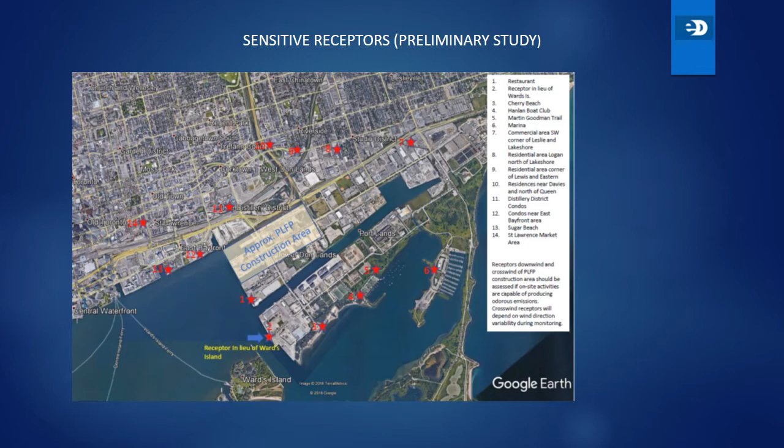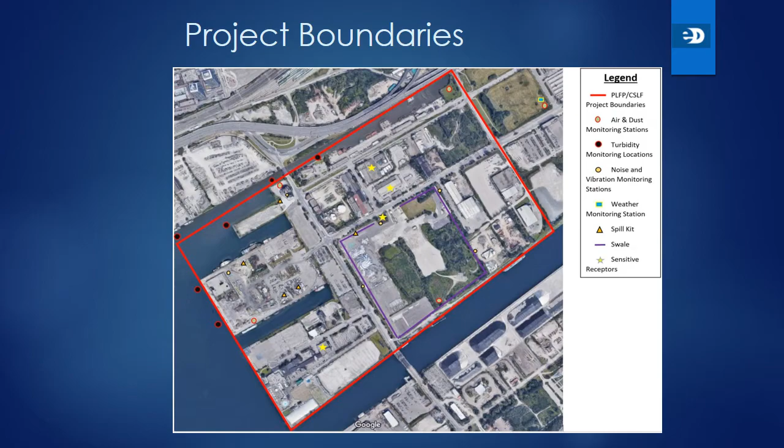Team and subcontractor responsibilities. We as a team must enforce the environmental plans, just as it is everyone's responsibility to ensure the safety of workers. It is everybody's responsibility to ensure the safety of the environment as well. At the end of the day, we want to make sure that we are managing the impacts of our work zone within the guidance of our environmental plans.

So in the event of a complaint or ministry visit, we can justify our actions. In terms of monitoring, inspections, or reporting, we rely on our subcontractors to inspect their site and report on any deficiencies that may arise, so they can be addressed proactively rather than reactively through a client or public complaint.

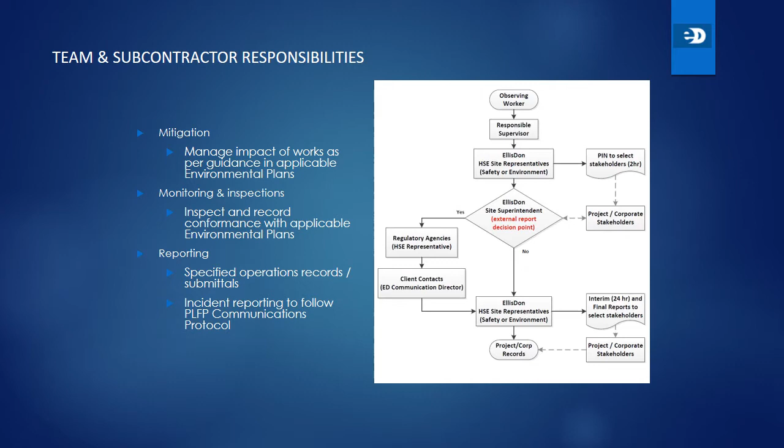Air quality and dust controls. The material that is being excavated on the Port Lands site is heavily contaminated. Because of the baseline studies completed prior to the project, it was determined that EllisDon would have to ensure adequate air quality monitoring. Volatile organic compounds, also known as VOCs, have been found inside the soils and are known to be harmful to workers' health and safety, as well as the public health and safety.

What EllisDon has done is set our exposure limits to the most stringent levels, set out by the Ontario government's occupational exposure limits. Benzene has the lowest exposure limit for VOCs, and also has the highest level of concern. All subcontractors completing excavation work on the Port Lands job are required to do VOC monitoring.

The 8-hour time weighted average is 0.5 ppm. If surpassed, a half-face respirator must be worn to continue work. If the short-term exposure limit, also known as STEL, is exceeded to 2.5 parts per million over a 15-minute period, a half-face respirator is required. If 5 ppm is exceeded, a full-face respirator must be worn.

If a full-face respirator cannot be worn, the area must be evacuated until proper controls or PPE can be put into place. If the full-face respirator is donned, this level of PPE will cover the worker until 25 ppm, at which point the area must be evacuated and no worker shall enter the work zone.

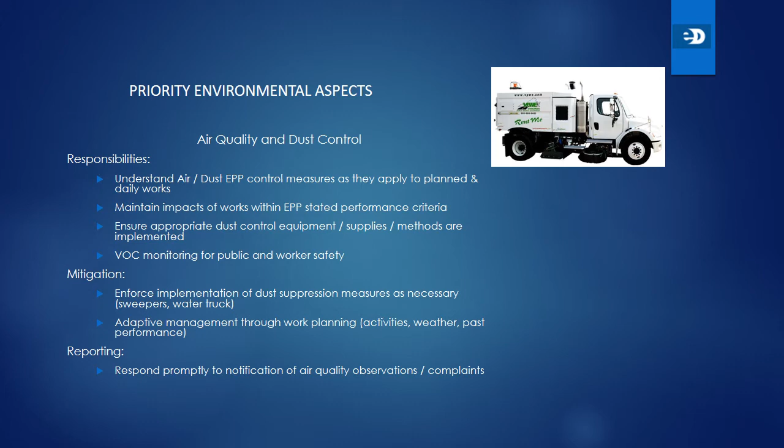Dust management. There are 5 air monitoring stations around the job site, which give us real-time updates on how we are impacting the areas around us, and how we are managing the site when it comes to dust and air quality. If there are any concerns regarding air quality or dust management, please reach out to your supervisor, EllisDon Health and Safety, or EllisDon's environmental team.

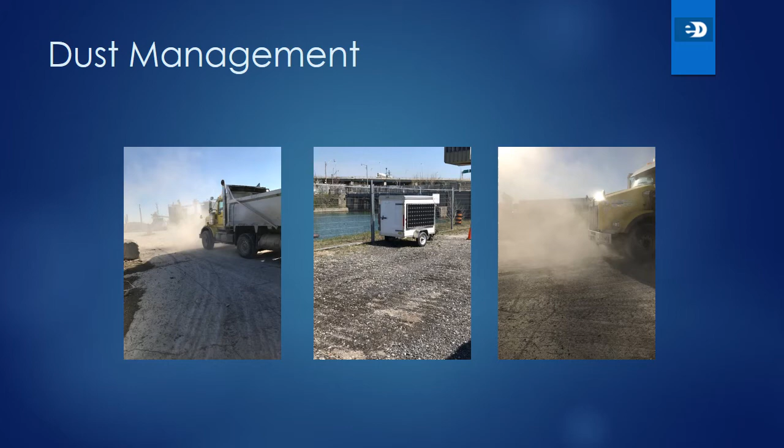Odor management goes hand in hand with air quality because they are usually linked together. Some material on site is extremely odorous. You can usually smell a hydrocarbon coal tar odor. Odor, although it is not directly harmful to anyone, can be a good indicator that there could be air quality issues such as VOCs. If you are noticing significant odor, please notify your supervisor to ensure that there are no air quality concerns associated with the smell.

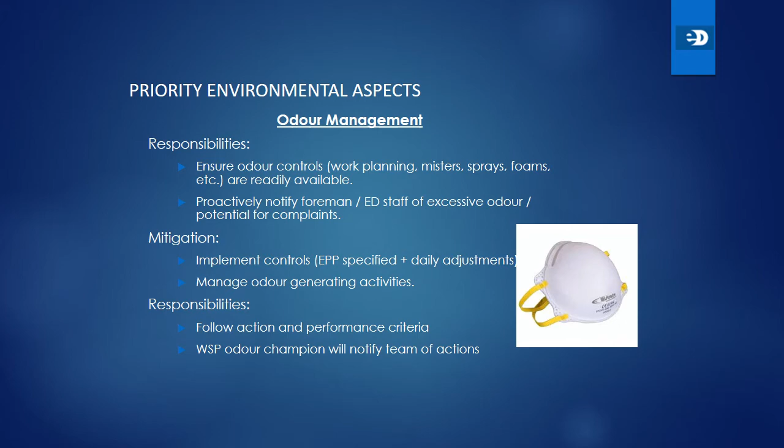EllisDon and its subcontractors have different mitigation that can be put in place when it comes to odor. The misters are the first level of mitigation once there is an exceedance alert. Once the misters have been deployed, if the exceedance continues to persist, then foam will be applied to the excavation.

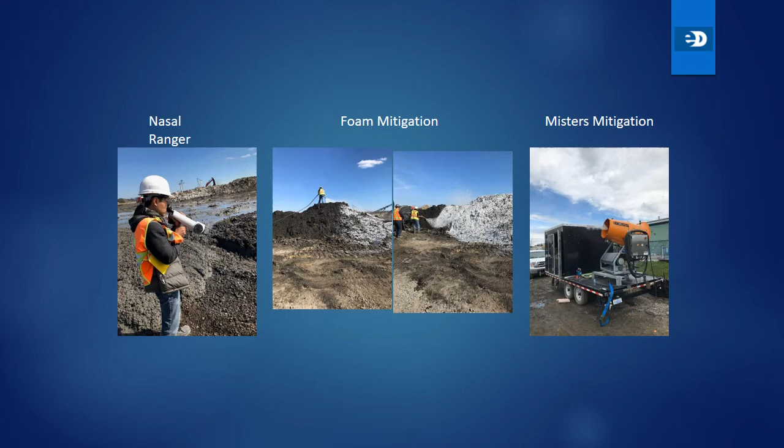Erosion and sediment control continue to be an ongoing issue, especially with the contamination on the site. EllisDon and its subcontractors must ensure that erosion and sediment control measures are in good working condition. Sediment tracking onto roadways is important to keep on top of because of the high contamination we are dealing with.

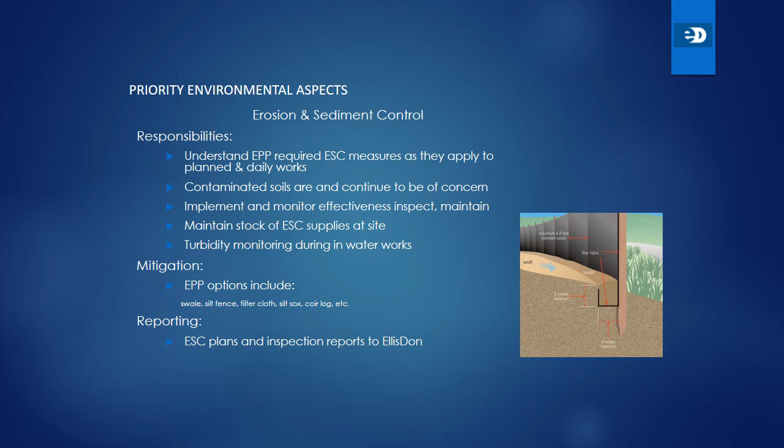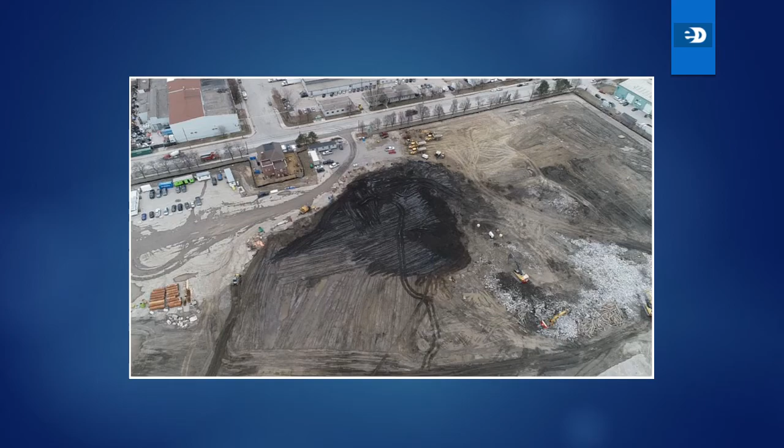Coir log, silt socks, silt fence, and other erosion and sediment control measures can be found around site, and if there are any areas that require maintenance or replacing, it is the responsibility of the subcontractor to inform EllisDon so the appropriate measures can be taken and fixed.

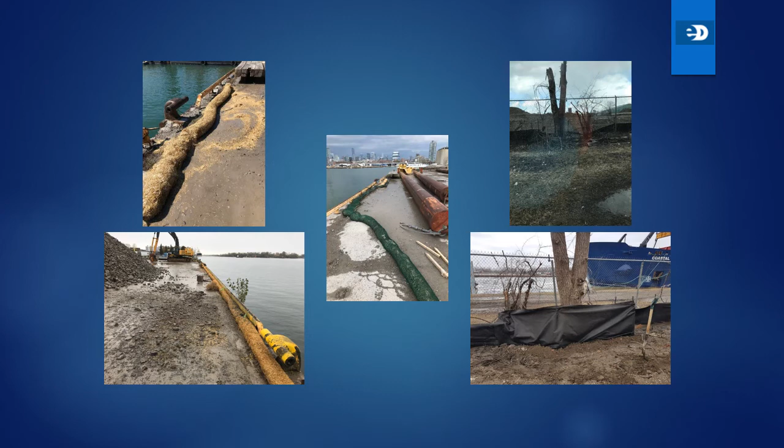Spill prevention. The big things with regards to spill prevention is that both EllisDon and the client have put a great deal of emphasis on reporting all spills on site, regardless of their size. Ensuring spill kits are stocked and available in the work zone can prevent these incidents from happening in the first place. That's why they are requirements of the environmental protection plans.

The client has requested that the reporting criteria be set out as follows. For every 0 to 10 liters, you must treat it as a minor release. Clean up and document by EllisDon and the subcontractor and report it to the client on a monthly basis.

For every 11 to 100 liters, you must treat it as a significant release that will be cleaned up, documented, and reported to the client immediately, so they are aware of the potential impacts to the site and the cleanup and prevention measures that were put in place so it does not happen again.

Anything greater than 100 liters, or any amount entering a watercourse or catch basin, must be reported to EllisDon, the client, MECP, TRCA, City of Toronto, and the Spills Action Center. EllisDon requests that they communicate the issue to the higher authorities to ensure that everyone is on the same page and all boxes are checked off appropriately.

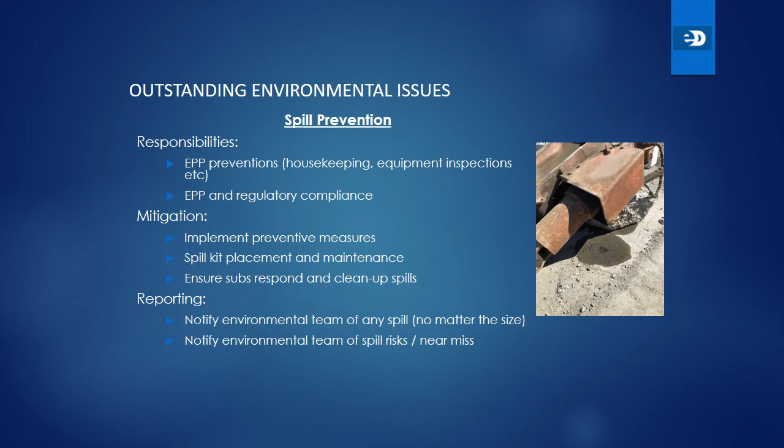Thank you for watching the Environmental Site-Specific Orientation.